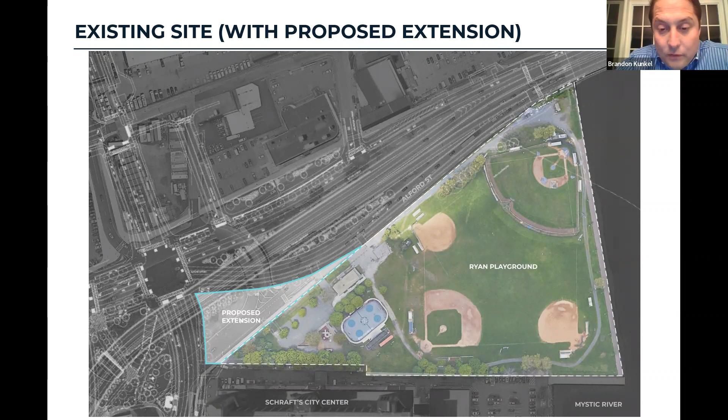Next slide. This should also look like a familiar slide, but just a refresher for everyone. We have done a site analysis. So if we were to start at the Mystic Riverside, or the right side of the slide, we are dealing with Coastal Bank, a waterfront area, a designated waterfront area, a 100-foot buffer, and existing trees.

Land subject to coastal flowage, or land designated as within the flood zone, as well as utility easements. I'm sure many of you are aware that Eversource has a major easement that runs through the park. That's the shaded purple area on the north side, or the street side, Alford Street side of the park. There's also Boston Water and Sewer, which has 2 easements within the park.

We'll talk a bit more about that as we move through the concepts, but just wanted folks to be aware. There is the existing storage and concession stand building, the existing hockey rink, youth baseball field, little league fields, and softball fields that are currently out there today, as well as the playground and the small parking lot, about 25 spaces that are out there today. It's a great site, with great views towards the bridge as well as across the river itself.

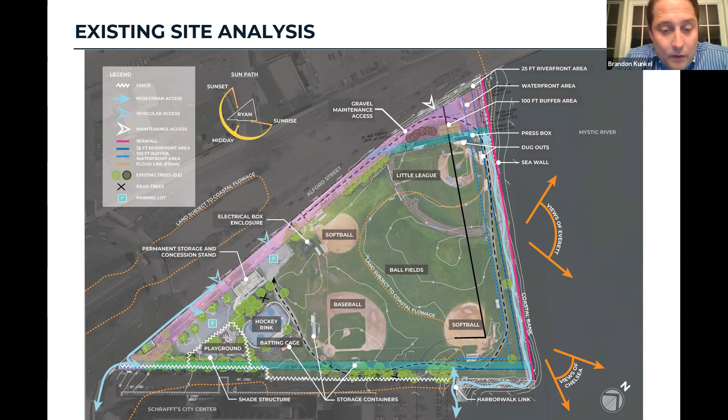On the lower side of the page, we have the Schrafft City Center project. I'm sure many of you folks participated in the Flatley meeting for their project a couple weeks ago. We had a few folks who not only participated in it but also listened in on the meeting as well. So, next slide.

So, what we heard at meeting number 1 — this is really to make sure that, like I said, we're on track. This is all based on the feedback that we've heard so far through the various ways of communicating, whether emails to Bea or through the survey, or through meeting notes based on the last community meeting, etc. This is just a way to make sure that we're hearing you correctly.

And if we're not hearing it correctly, we would like for you folks to chime in and make sure we are. So this is just a summary of the questions that were asked in the survey results.

How often do you visit? There's quite a bit of visiting happening throughout the week. Most people are visiting at least once a week, 58%. 35% are visiting multiple times a week, which is great that the park is getting used so much.

Most people are walking to the park, about 60% by foot, 26% by car, 10% by bike.

What do you typically do at the park? 60% are walking, which coincidentally falls right in line with how you get to the park. About 52% are using the playground. And then waterfront, baseball, exercise, street hockey, other field sports, and then passive picnic and other passive activities.

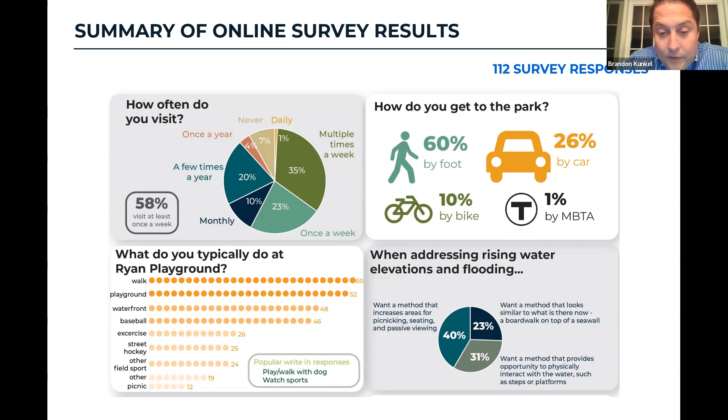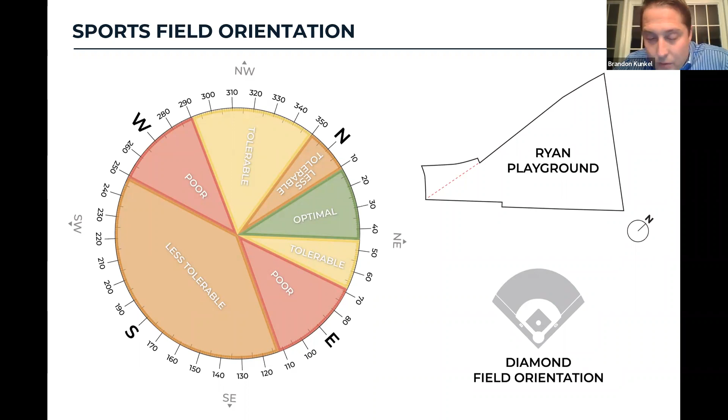There is poor orientation, which is really related to the sun and how it affects the players, and good orientation, which is the safest whether or not the sun is in the batter's eye or the pitcher's eye. Next slide.

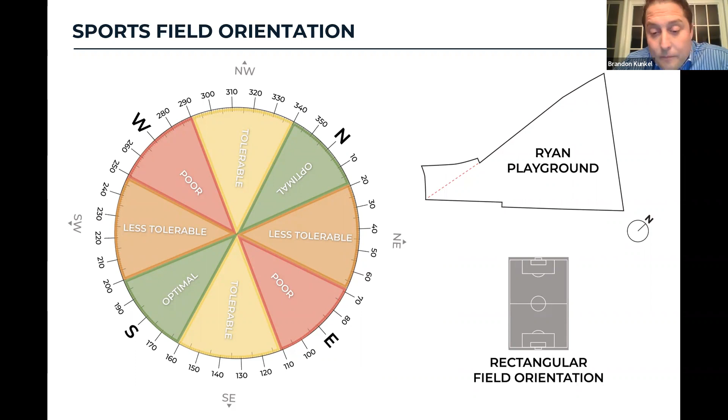For courts and rectangular fields, the orientation is north-south. You can see in the graphic here the relationship of the diagram to the left to the orientation of Ryan Playground itself. So as we move through the concepts, you'll see some of the orientation of the fields and the possible courts that may or may not be added. Next slide.

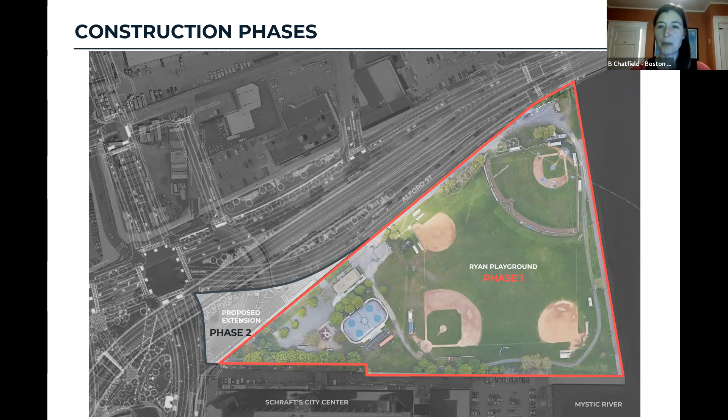So when we prioritize what we want to put in phase 1 versus phase 2, this is just understanding that whatever we show in phase 2 is going to arrive a little bit later, or significantly later, depending on how you consider time. So if we could go to the next slide, please.

I'm not going to start explaining these plans—that's for the design team—but I just want to set the stage by talking a little about Boston Parks. We've been working with the Climate Ready Boston team and others throughout our city to understand where the parks are in our system that we should really be focusing on for resiliency efforts. The project at Ryan is happening not only because our playground hasn't been comprehensively renovated in quite some time, but because our waterfront is a point of vulnerability for Charlestown.

So what we're going to show you in these next few schemes are different approaches to the water's edge, allowing for different kinds of interaction. We have to change the water's edge, we know that, so how should this happen? Do you want a deck at the water's edge? Would you prefer something softer with a focus on plantings? Is a pathway a good way to experience the view, or would you like something broader, like a gathering area? We'll balance the responses we hear tonight with our budget considerations going forward, but we hope these schemes will show you the range of options for the whole site, and for the waterfront specifically.

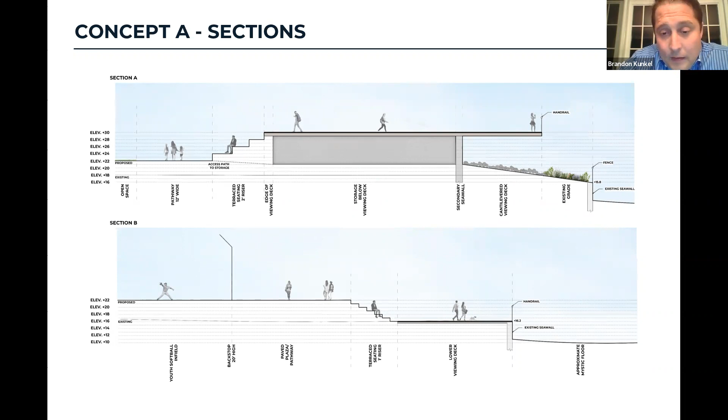So once again, we'll start at the water and work towards Sullivan Square. We're looking to maximize the ability to interact with the water at the existing elevation of 16 on top of the seawall.

Once again, elevation 22 is the critical elevation we're looking to achieve for sea level rise and climate resilience. So we would transition up from elevation 16 up to elevation 22. And really what we're doing here is ultimately creating a berm that allows the fields to stay more or less at their existing elevations, or at least the multi-use three baseball, softball fields plus the rectangular area.

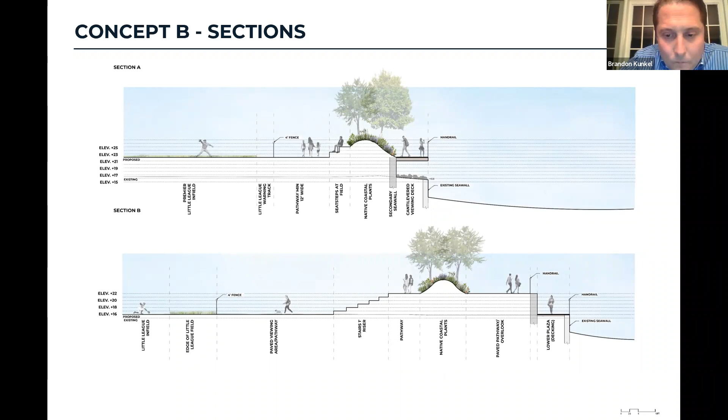And then we would cantilever a boardwalk, or just have different elevational changes based on wherever you are within the waterfront area. And then we would berm up to provide some separation between the fields and the water's edge, and then possibly provide some built-in seating for viewing for the fields themselves. Next slide.

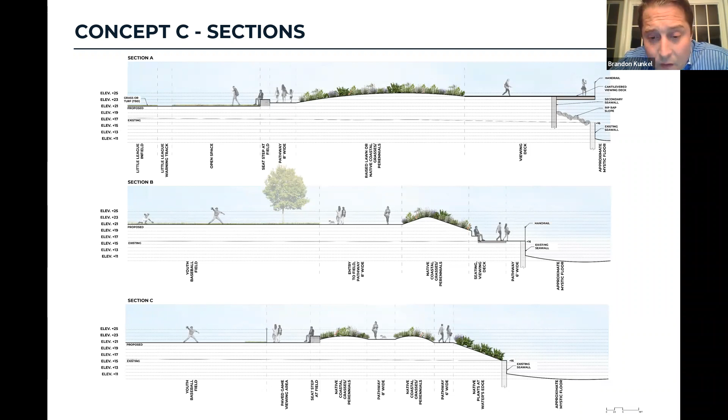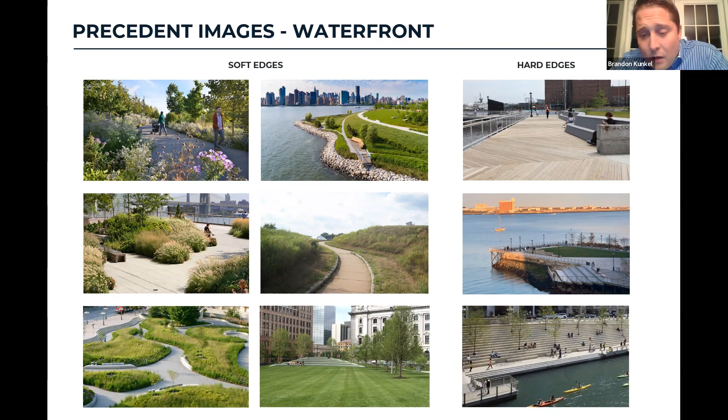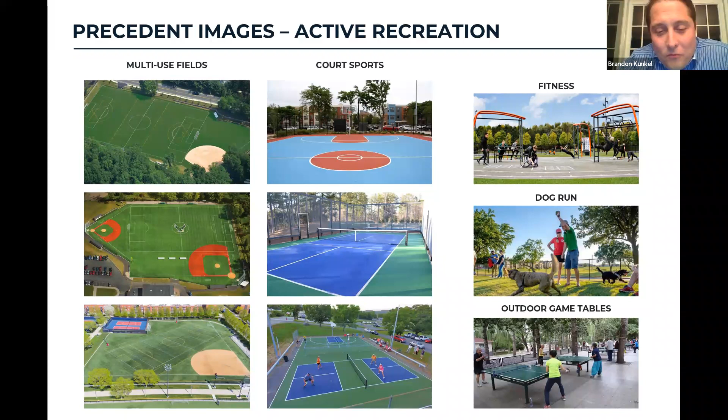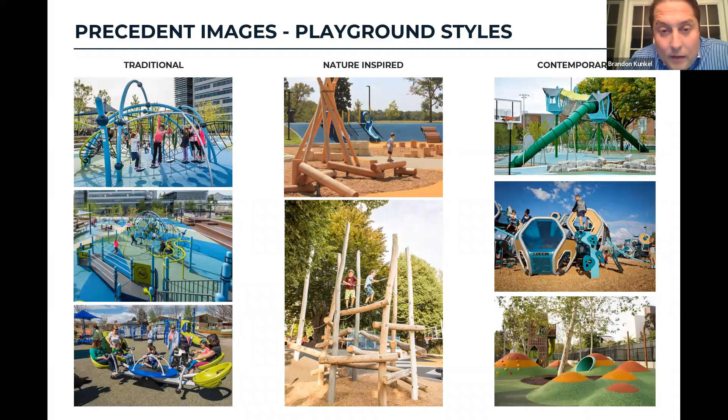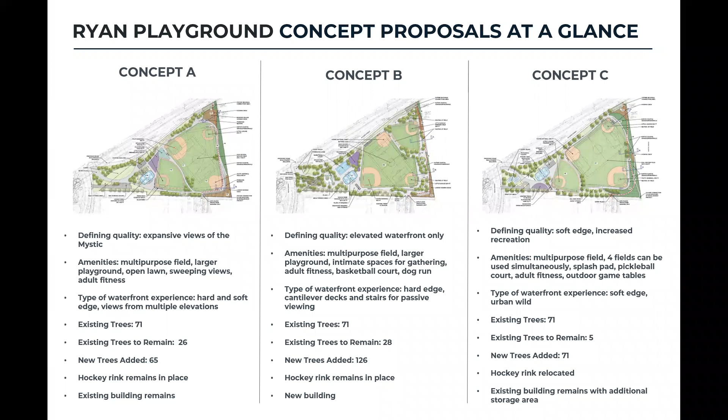I just wanted to acknowledge two people that had asked questions in the chat. I'm not sure if they got their answers. One was from Emily asking, are there any wildlife concerns with synthetic versus natural turf?

Thank you for bringing that to our attention, because that did slip by me. I think there are wildlife considerations in that synthetic turf is plastic, and plastic degrades over time. The particles migrate into local water bodies, down into the water table. It's not a great material as far as being eco-friendly, animal-friendly, wildlife-friendly. So that is the straight dope on that.

It's something where if we decide to go with synthetic turf, it's going to be because we are openly prioritizing maximizing the use, and we would try to go with something that mitigates those negative effects as much as possible. Some synthetic turfs have infill material, like a crumb rubber that, when it rains, goes everywhere. We would probably not be allowed to use that kind of thing here in our waterfront location—the Conservation Commission would have something to say about that. But there are ways we could try to balance it, though ultimately, synthetic turf is plastic, and plastic is not great for the natural world. So thank you for asking that.

There are a couple of other questions I'm looking at. Tim McKenna says, can you share the full soccer field sizes for plans A versus C? There's also a couple of parking questions. Gracie, can you go back to concept A real quick, and then we'll flip to concept C just for conversation.

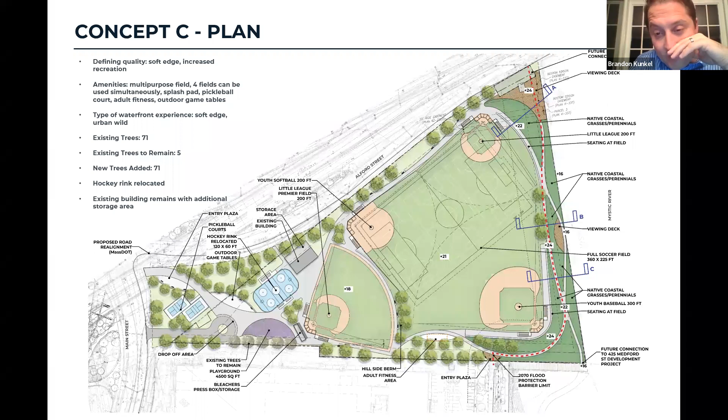Concept A and B show a 300 by 180 footprint of a high school soccer field. Concept C would be what we consider full size, really an MLS professional size soccer field at 225 by 360.